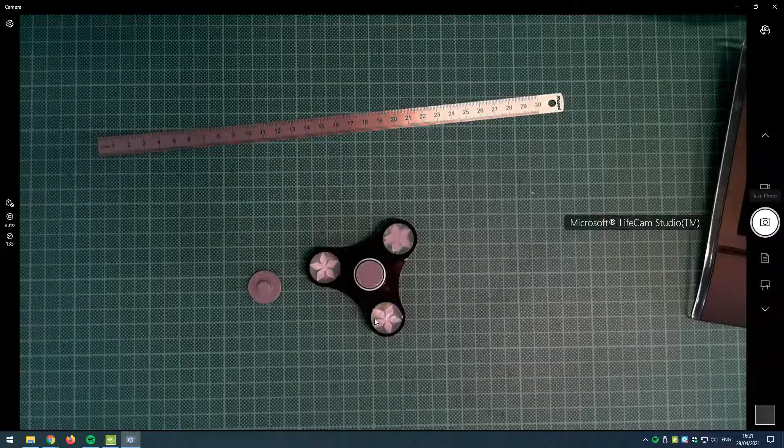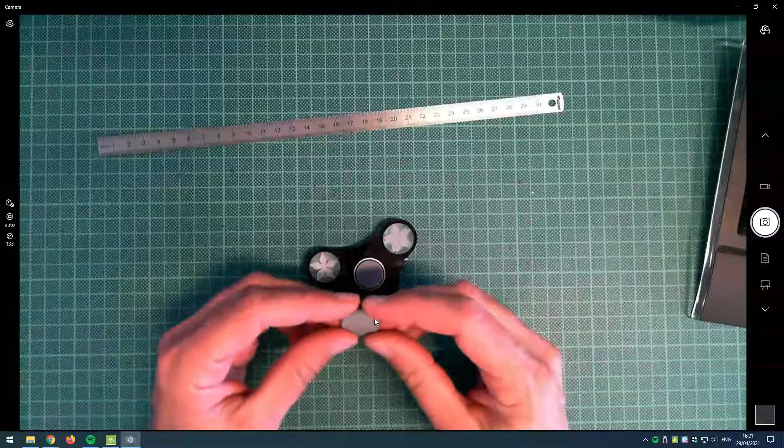Okay, so in this video, we're going to look at making this little finger pad. Is that what you'd call it? I'm not too sure, but a little 3D printed pad here that is going to become the finger and thumb grip of a fidget spinner.

Okay, so there's my fidget spinner. There's a pad on the one side. If I turn this over, there's a pad on the other. I've not taken off the protective plastic here, just so that I can talk about it in future demonstrations.

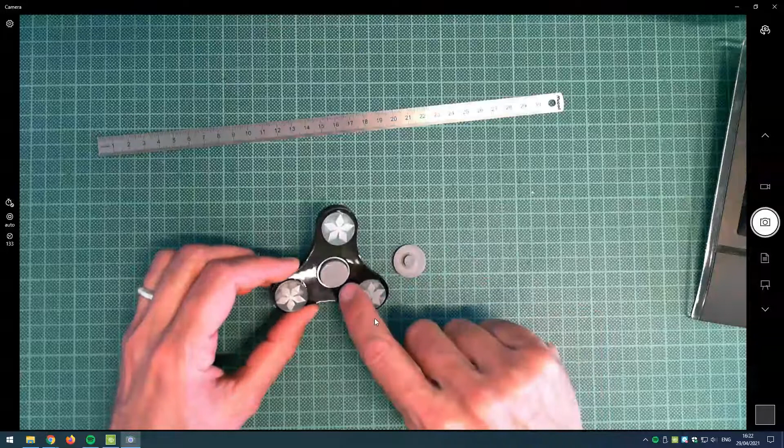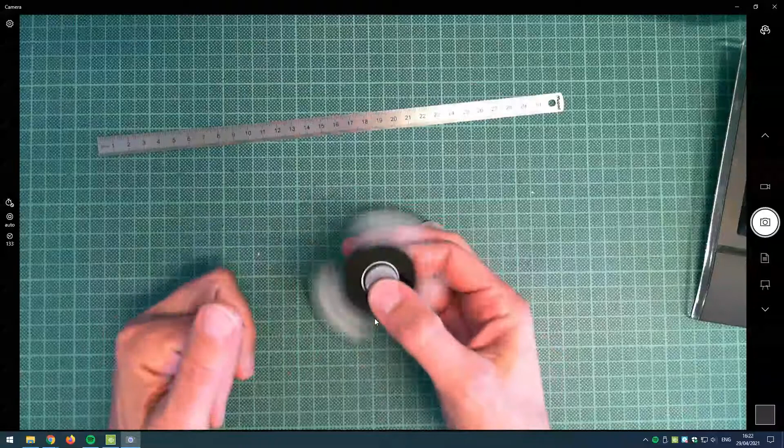But here's a pad that's been made, and this is actually slightly bigger than the pad that I've got here. This pad would actually cover the metal profile of the skate bearings inside this fidget spinner. But with this one that I'm going to show you now, I felt as if showing the metal bearings was actually quite a nice feature. So when we get onto the dimensions of this outer circular profile, you could make this a little bit bigger, but I kind of quite like that.

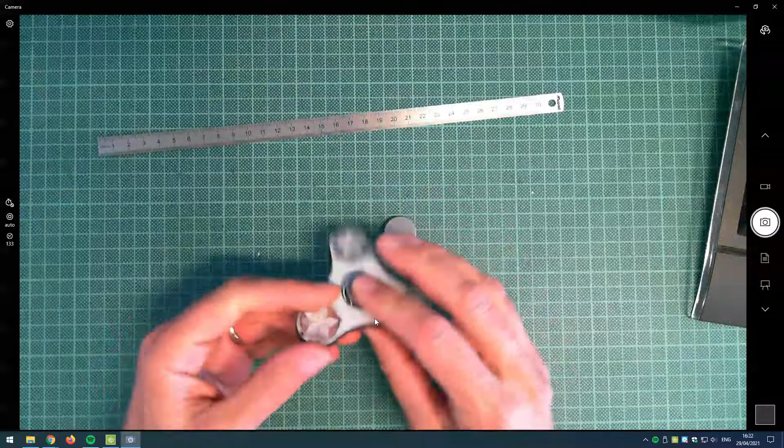Okay, so here we go. Let's go on to Tinkercad, which we're going to be using. Now, I've got the actual finished product here. I'm not going to go through the whole making. I'm just going to show you the key features of this. So let's have a look at this from the top. And notice here that I've got this in orthographic view.

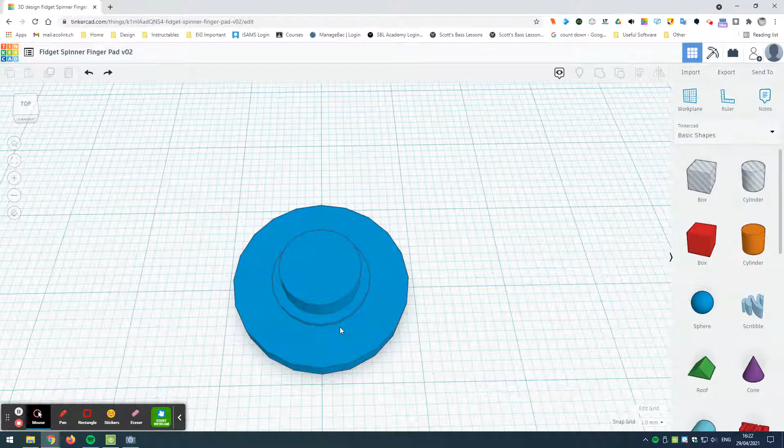If I go to perspective view, then what's happening now is I'm kind of distorting the image with the perspective effect. And that's actually difficult, I find anyway, compared to working with things in a flat orthographic view. So I'm going to go back to the orthographic perspective. And now if I look from the top, then basically everything is lined up like a flat image from above. So I've got the smaller circle here, which is going to go inside the skate bearing.

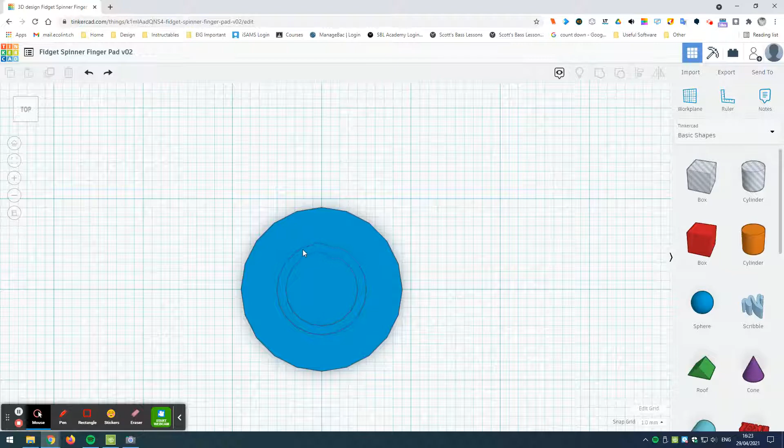Then I've got another circle here. If I look at this from the front, this actually allows me to space the thumb pad away from the bearing edge. And so the idea is that this is reducing the likelihood that this thumb pad is going to physically touch the bearing itself, which could cause friction. So that's the idea of this little thin layer here. And then finally, we've got the actual pad that we grip with our finger and thumb.

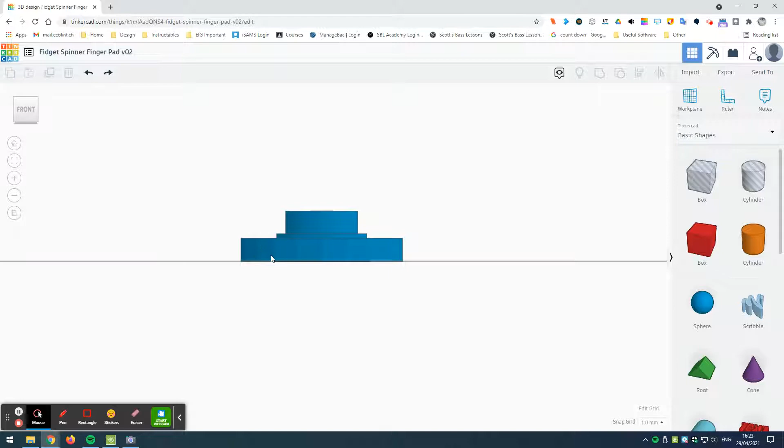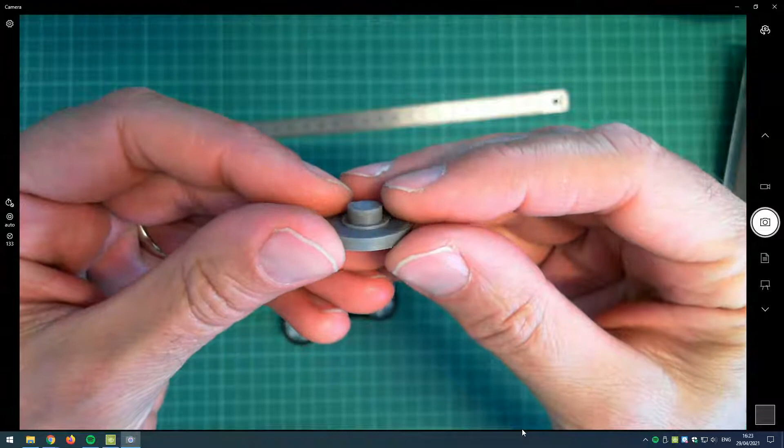So that hopefully explains what is happening in terms of this little design here. I can zoom in here and hope you can see that a bit more clearly there. Okay, so that is what we are after. Good. Okay, and of course it's going to be 3D printed. So let's come back to Tinkercad again.

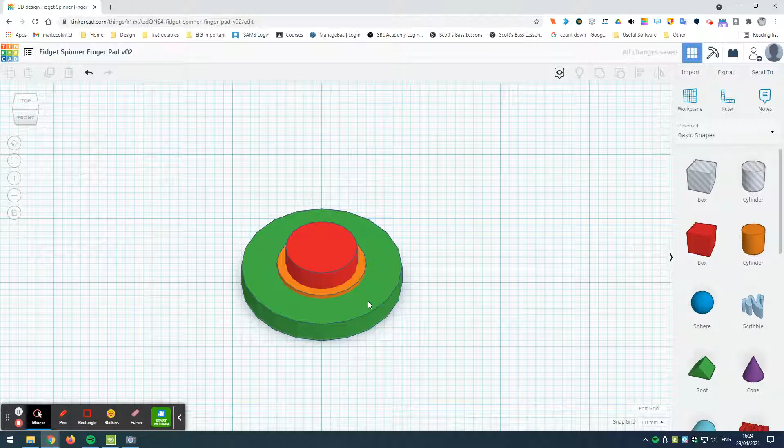If I select this, I've grouped this together, so I'm going to break it apart. I'm going to ungroup it, and you can see now I've color-coded these separate sections. I believe there's a note feature here, isn't there? Could I add a note onto this? Look at that. Okay, so I'm not going to worry about it now, but for future reference, I should do that, shouldn't I? Okay, so what I'm going to do, first of all, is go into the top view here.

I'm going to select each of these circles. So the red circle first. This goes into the center of the skate bearing. I'm going to mouse over the handle there, and I can see that that has a dimension of 8 by 8 millimeters. And as it's a circle, that means that this is going to have a diameter of 8 millimeters.

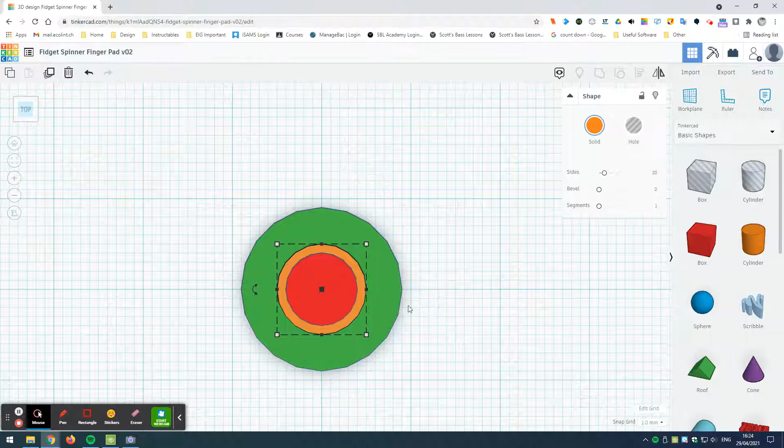If I now select the orange circle, which is the little spacer, I can see it has a diameter of 10 millimeters. And finally, if I go to the thumb pad, I can see this has a dimension of 18 millimeters.

Incidentally, if I wanted it so that the thumb pad here... let's try and make this focus again. There we go. If I wanted it so that the thumb pad... okay, the camera has completely crashed. There we go, we've got it back again now. No we haven't, the camera's having a problem.

But if we wanted the thumb pad to completely cover the metal bearing here, this is 22 millimeters, the bearing size. So I would imagine 22 millimeters rather than 18 would be the size to go for the thumb pad. Right, okay.

So that's looking at them from above. Let's now have a look at this from the side. Okay, let's go back to the thumb pad first. So this was 18 millimeters diameter, I can even see it if I mouse over there. And if I have a look at the height of this, I've got this as 2.5 millimeters in height. Let's just zoom in a bit here.

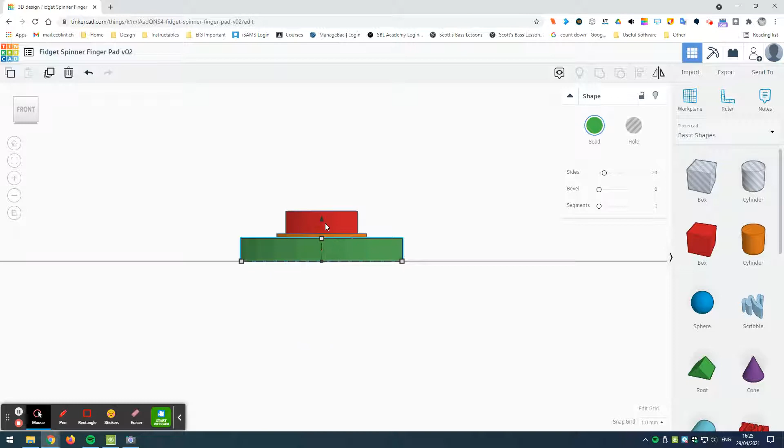Let's now look at this little spacer. This is 0.5 millimeter in height. And then finally, let's have a look at the actual pin that goes into the bearing itself. That's 2.5 millimeters in height. So just rewind the video there if you want to get those dimensions back.

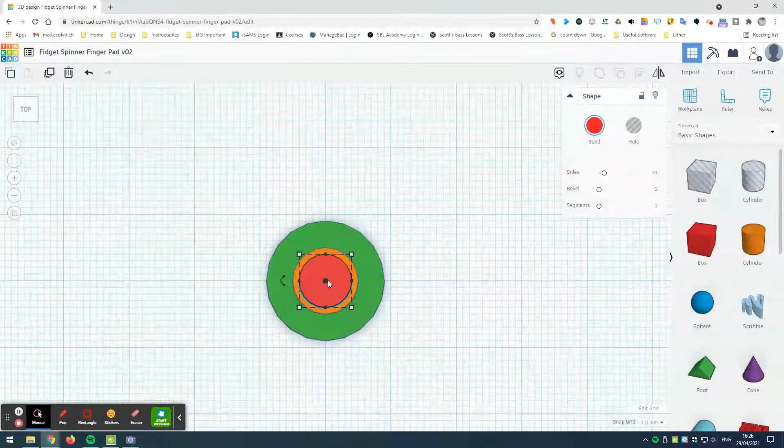And the last thing I'm going to do here is look at this from the top again. Let's just zoom out again here. And now what I'm going to do is just pull these off to the side. Let's pull that to the side like that. And let's pull this off to the side like that. Now notice that everything here is on the grid. This is the center of the grid right here.

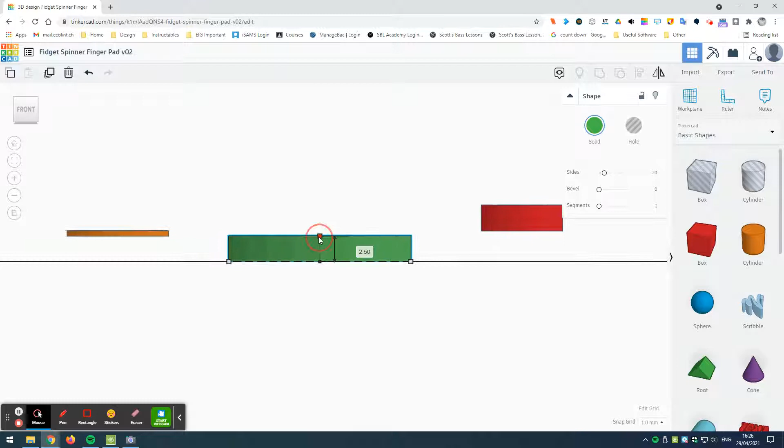Again, I can look at this from the front. I can see how this has been raised up. Obviously, if this is a height of 2.5 millimeters, then this must have been raised off the ground by a height of 2.5 millimeters. Now notice here, I cannot snap to 2.5 millimeters.

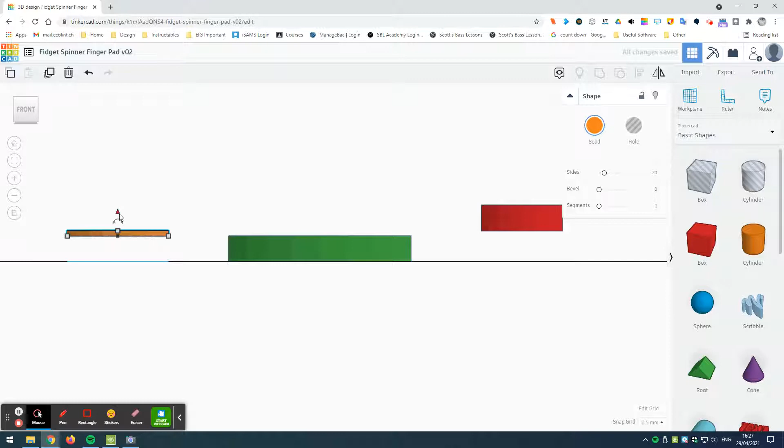What I need to do here is come down to snap to grid and make sure I've got this to 0.5 millimeter snap setting. And now you can see that I can pull that down to 2.5 off the surface of the work plane. Now, if that is 2.5 and this is starting at 2.5, and then has a height of 0.5, then hopefully we realize that 2.5 plus 0.5 is 3. So this is 3 millimeters off the surface.

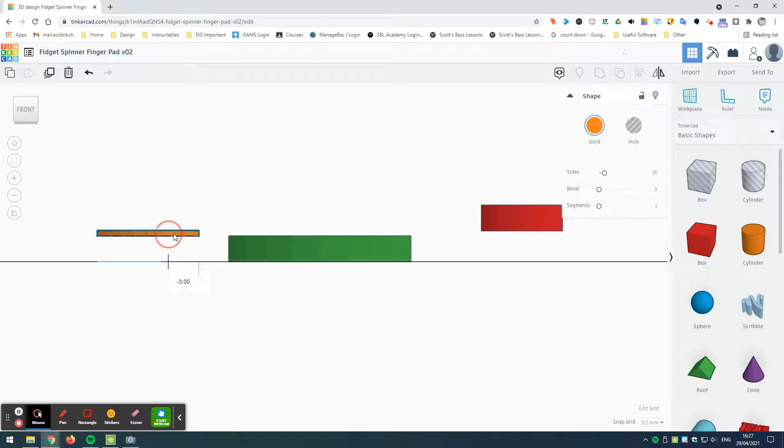That will make sure, of course, that now when I pull these back into the center of the design, there and there, that they're all going to slide in together. You can see how they all slid in together. Okay, let's just bring those back again there. And now let's look from the top again. And there they all are lined up again.

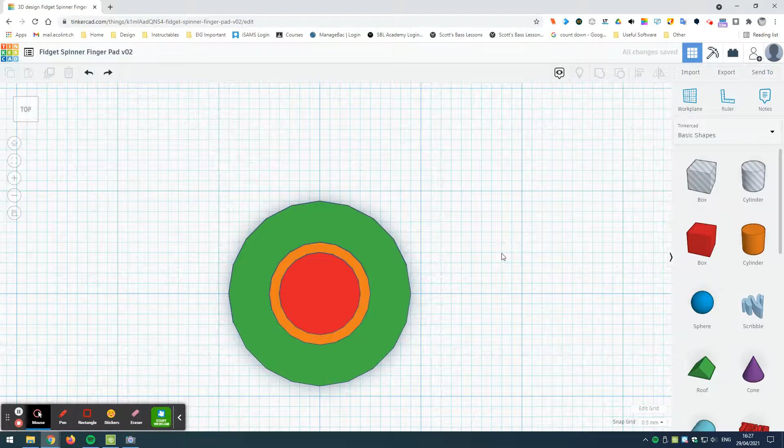So there you go, that is how I made this. Let's just select all those. Let's group them all together again so it makes one 3D print.

And don't forget that when you are ready to 3D print this, you need to go to export, and you need to export this as an STL, a standard tessellation language file, to send to the 3D printer. Good, there you go, have fun. And I look forward to seeing your finished fidget spinners.